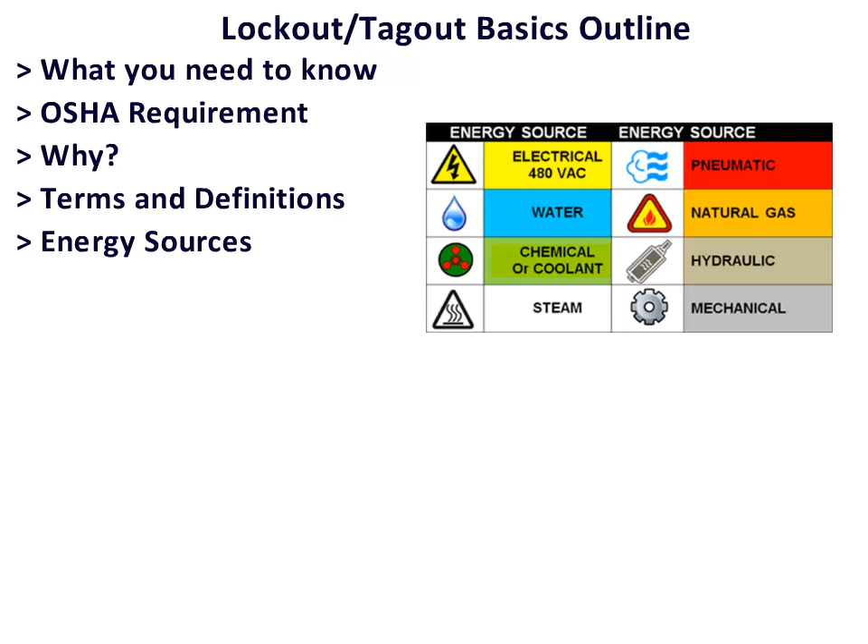We will touch on the types of energy sources. We'll step through the process itself. Next, we'll talk about the need for training. And finally, we'll provide some websites where you can find further information on Lockout Tagout.

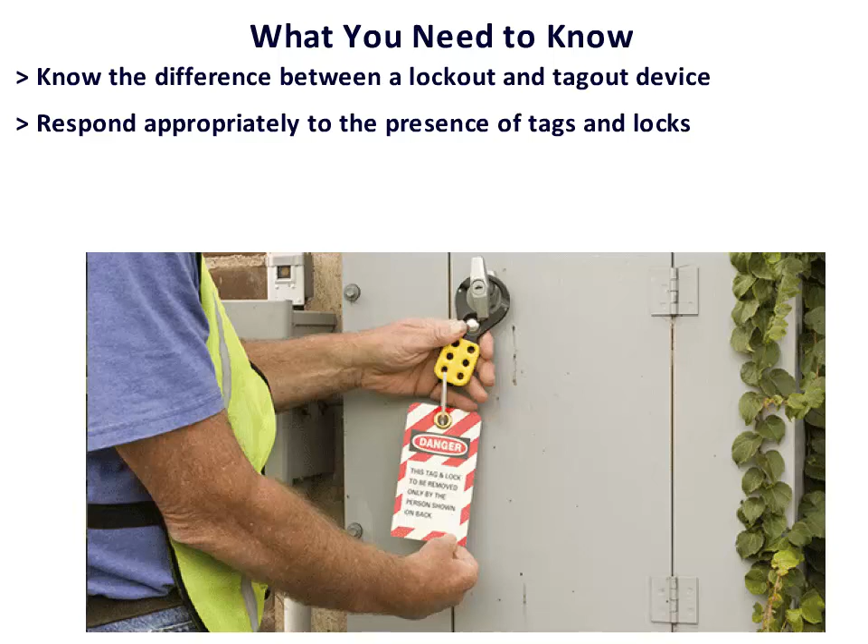Here are some key points that you need to take away from this module. You need to know the difference between lockout and tagout devices. You will need to respond properly to the presence of tags and locks. You should be able to recognize potential hazards of stored energy. You'll need to gain as much knowledge as you can covering NFPA 70E and OSHA CFR 1910.147. These will be covered in more detail throughout the module.

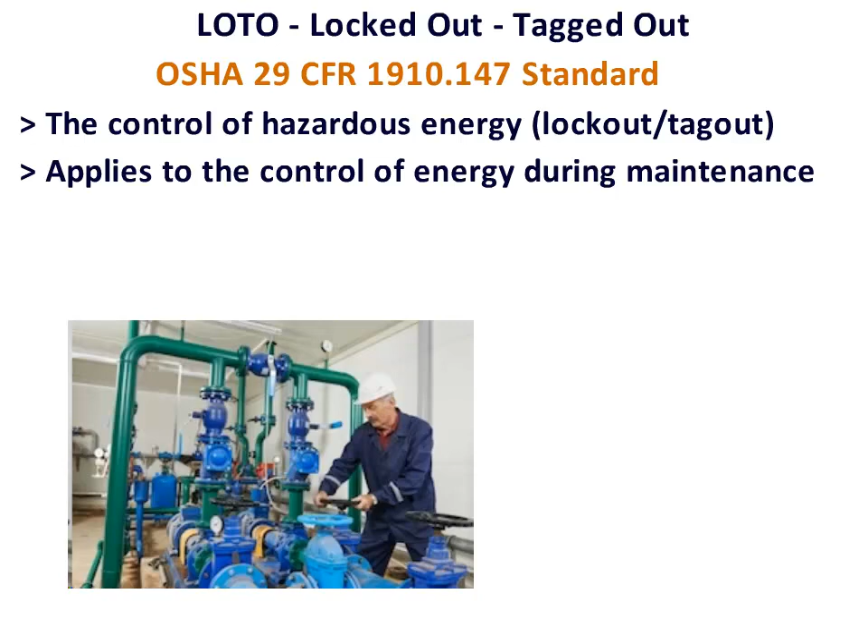You might hear electricians use the term LOTO. The L stands for lock and the O stands for out. The T stands for tag, and the last O stands for out. It's an outcome of OSHA Standard 29 CFR 1910.147. It defines the control of hazardous energy by locking out and tagging out equipment to avoid injury. It applies to the control of energy during maintenance conditions. All sources of energy must be secured during maintenance procedures.

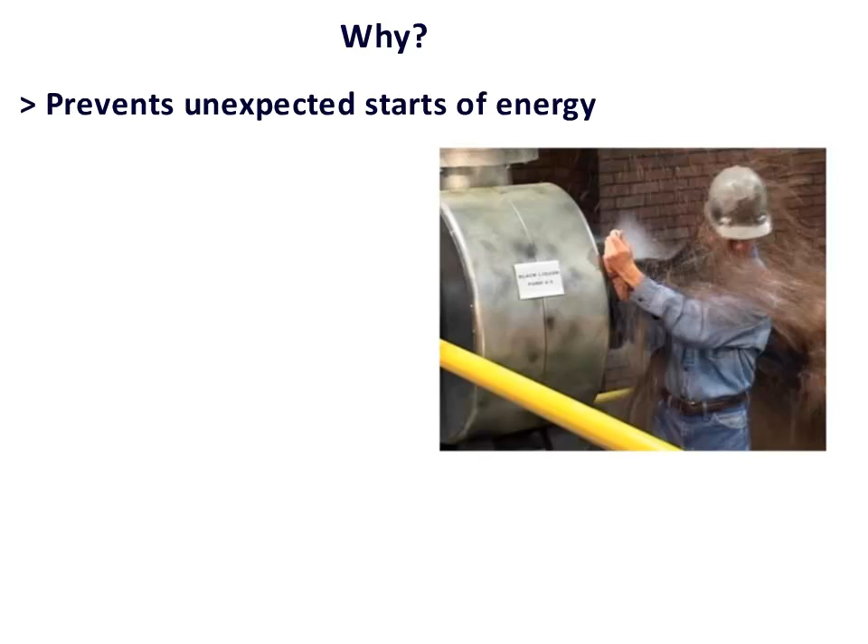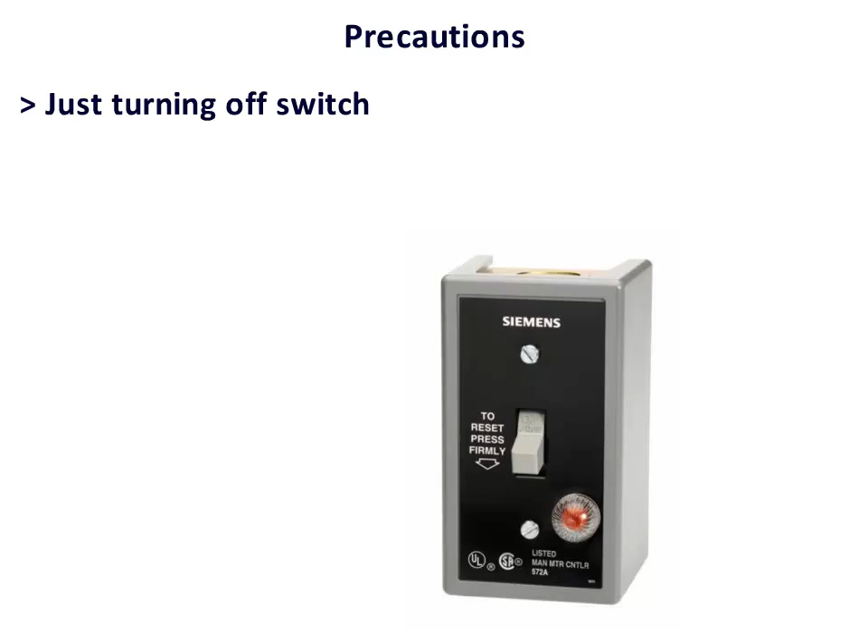Now let's discuss why this is important. First, it protects the worker from unexpected starts of energy. It is set up to prevent worker injuries. And lastly, it is designed to totally isolate a device so maintenance can be performed. It is important to remember that just turning off a switch is not the same as lockout because there is still energy in the switch. If there is a short at the switch or the machine is accidentally turned on, it will energize and cause it to run.

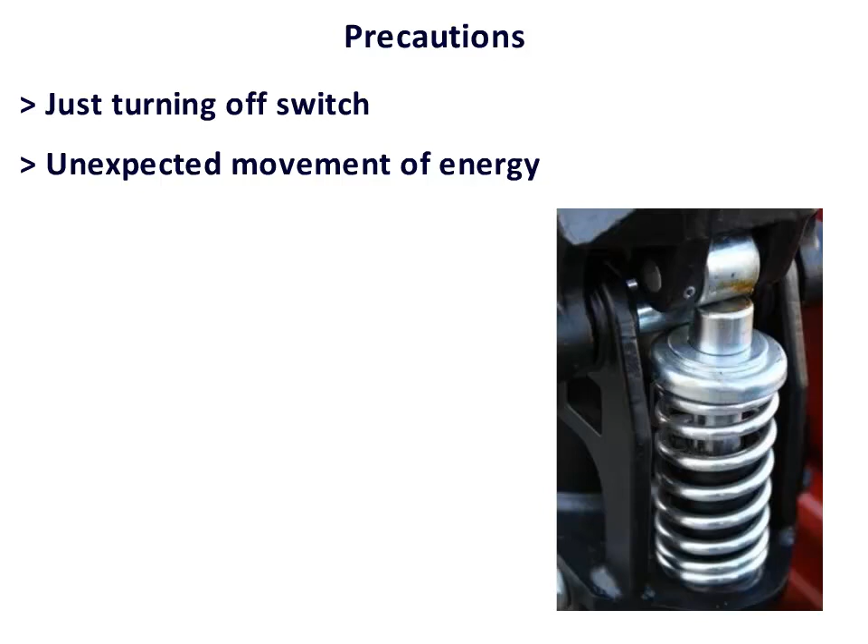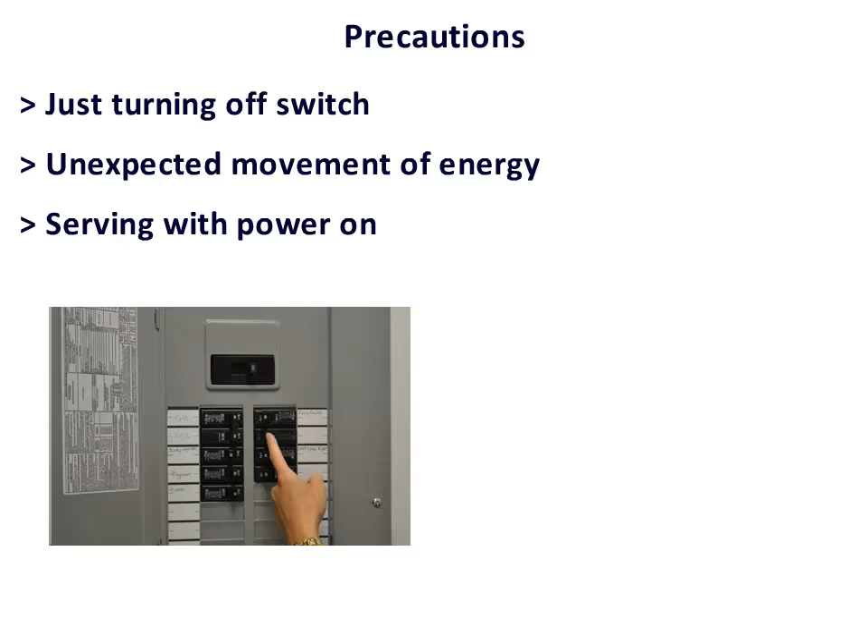Remember that many types of hazardous energy sources, such as springs or air, oil, steam, or water pressure, can cause sudden and unexpected movement of machines and hurt or kill you. To work safely, all hazardous energy sources must be controlled so that no machine or machine part can move. Sometimes machines and equipment must be serviced with power on. If so, your employer must minimize the hazards to you by providing extension tools, for example, extended swabs, brushes, and scrapers, or other methods to protect you from injury.

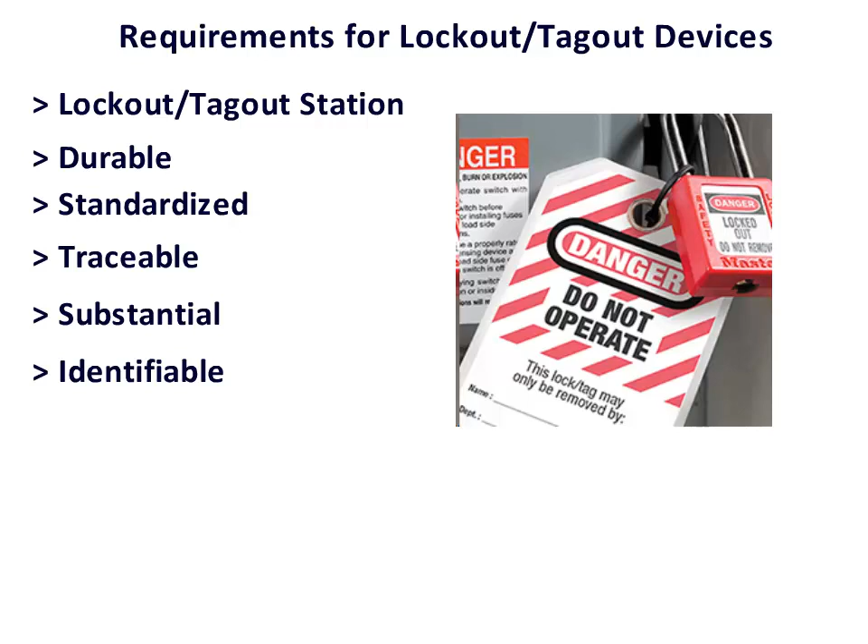Lockout tagout devices are usually organized in a center or station as seen in this photo. All lockout and tagout devices must have minimum characteristics. They must be durable and capable of withstanding the environment in which they are used. They need to be standardized by color, size, and shape to make them easily recognized by employees. They must be traceable by identifying the person who employed them. They should be substantially put on or in place or locked so that they cannot be accidentally removed. They should be identifiable with standard safety phrases such as do not operate, do not stop, or do not energize.

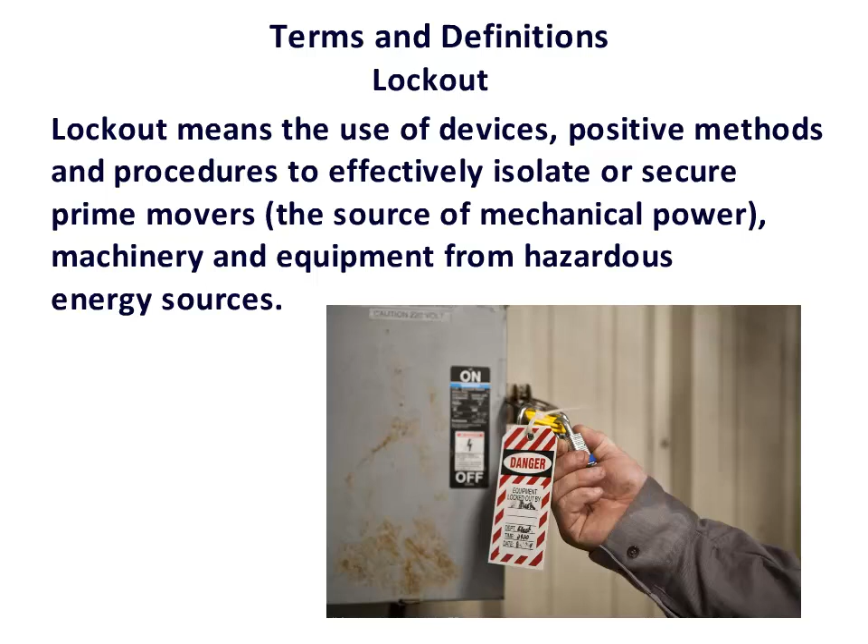The term lockout means the use of devices, positive methods, and procedures to effectively isolate or secure prime movers, which is the source of mechanical power, machinery, and equipment from hazardous energy sources. Its purpose is to provide safety to employees.

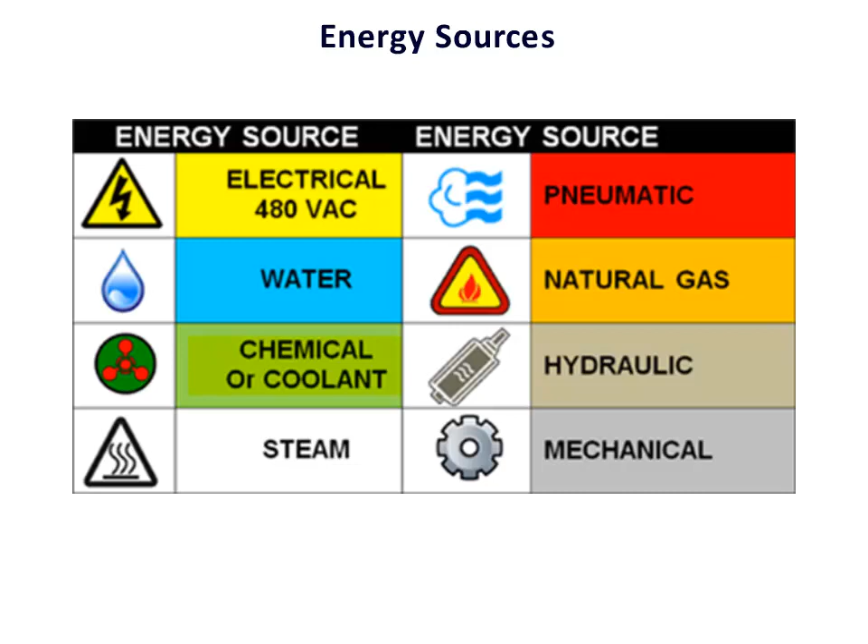Time to go over this concept of energy sources. You find these all over in a typical workplace. They are electrical, water, chemical or coolant, steam, pneumatic, natural gas, hydraulic, and mechanical. If not controlled during maintenance conditions, these can cause harm to workers. Now, what is a lockout device? It is a lock and tag with the contact information of the individual or authorized employee that installed the lock.

Here's a definition of tagout. Tagged out means to place a tagout device on the machine or equipment to show that it is prohibited to restart or operate the machine or equipment. It is important to note that this is a warning only. A tagout device is used when a lockout device is used or when a lockout device cannot be used and the equipment needs to be isolated.

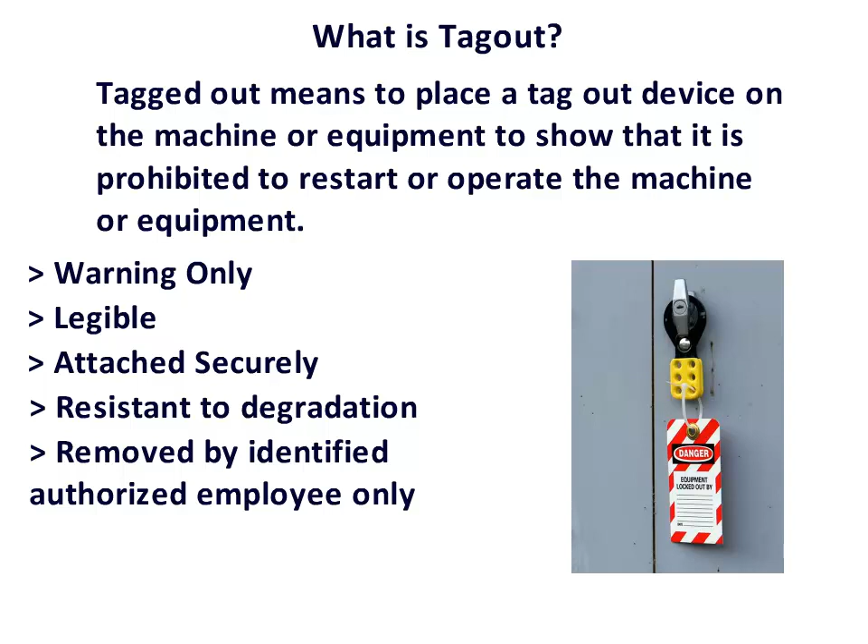Again, these are warning devices only, and they do not control hazardous sources of energy. They must be readable and legible so anyone working in the area can read them and understand them. They must be attached securely to the operating device at the same place a lockout device would be attached. They must be resistant to degradation so that they cannot be crumpled or unreadable. And finally, the tagout device must be identified by the authorized employee who secured the tag and can only be removed by that person.

It is important to understand what an authorized employee is. An authorized employee is specially trained to recognize sources of hazardous energy and to perform lockout or tagout procedures. This means that only the authorized employee can perform lockout and tagout procedures by attaching or removing locks and tags.

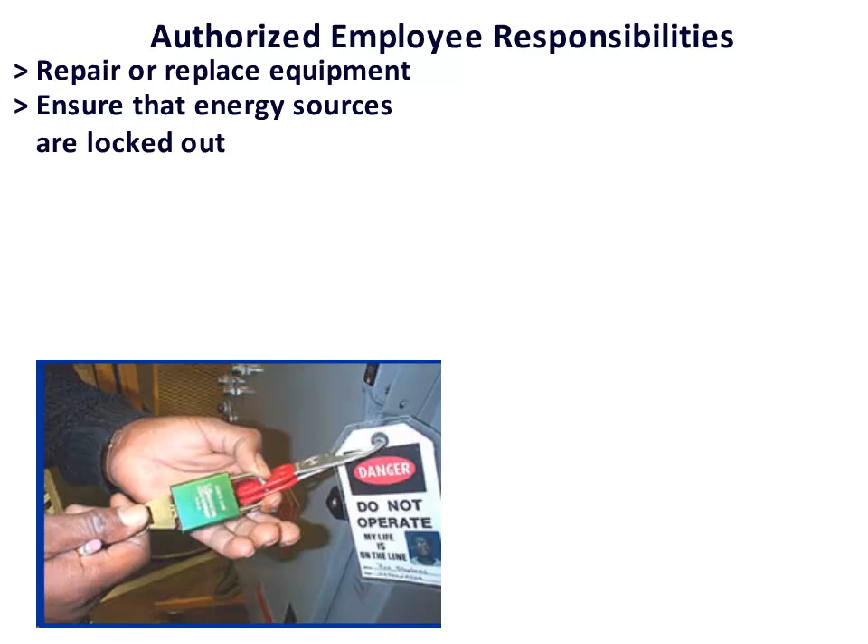Here are the important responsibilities of an authorized employee. They repair or replace equipment as needed. They must ensure that all energy sources are locked out. They need to test equipment to verify that residual energy is dissipated. Place warning tags on the equipment to make sure that other employees could not inadvertently start the equipment when it is being serviced or repaired.

They also need to obtain assistance when necessary to repair machinery or equipment. They must remove locks or tags when the service or repair is completed. And lastly, there may be instances when a repair may cross over different shifts. In this case, the authorized employee must coordinate and communicate to affected employees on all shifts.

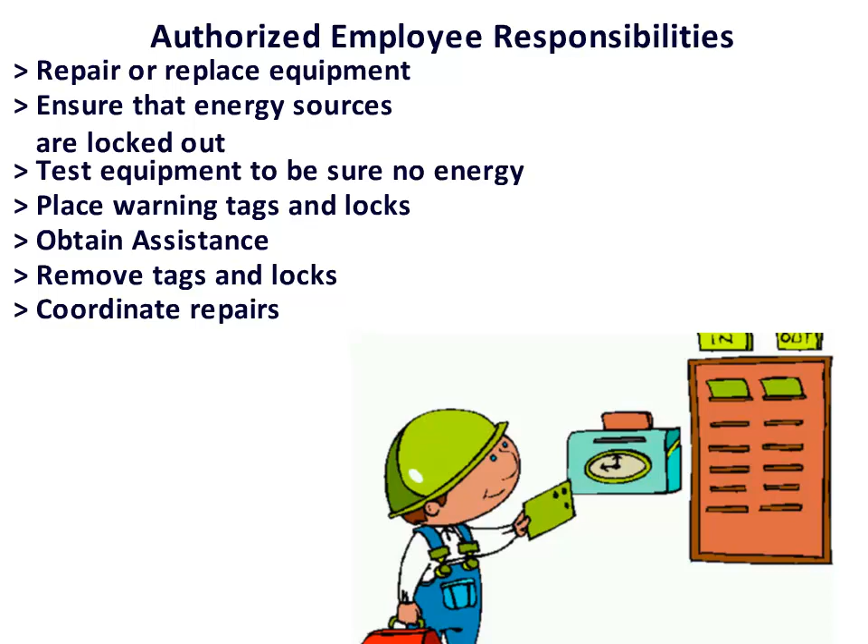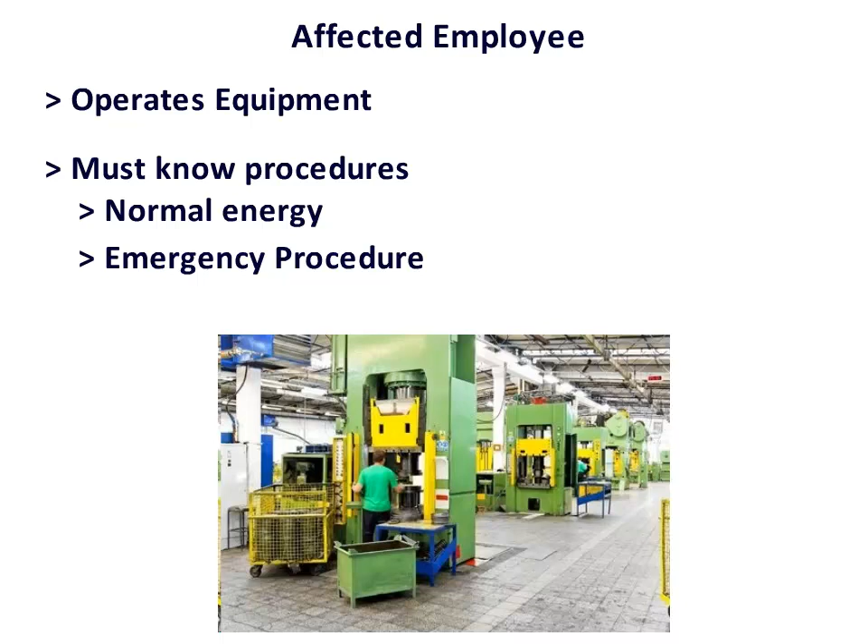An affected employee is one who operates equipment or machinery but is not responsible for servicing or repairing it. However, an affected employee must be trained to know the purpose and use of energy control procedures to make sure that an operator does not inadvertently energize machines when they are under lockout or tagout. The affected employee must also know what to do if the machinery was inadvertently energized as an emergency procedure.

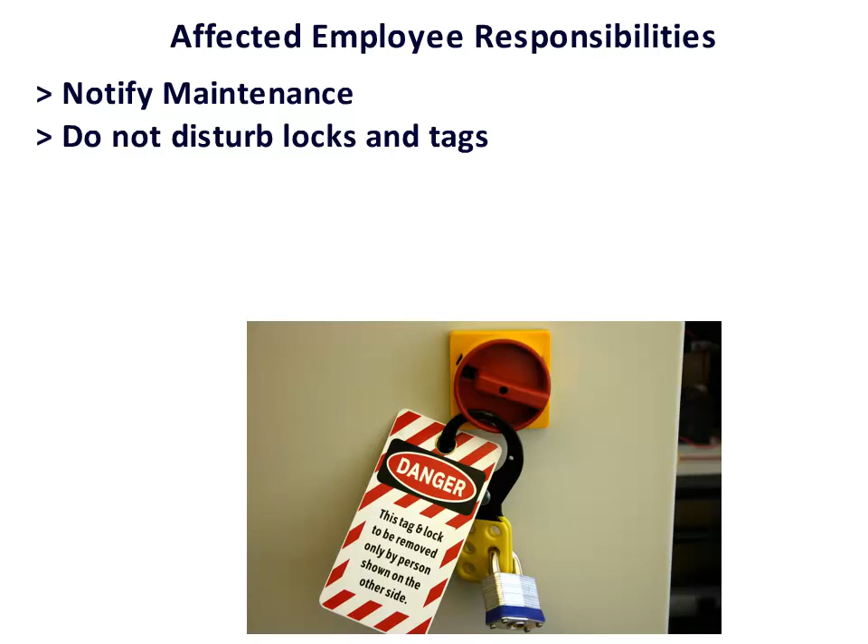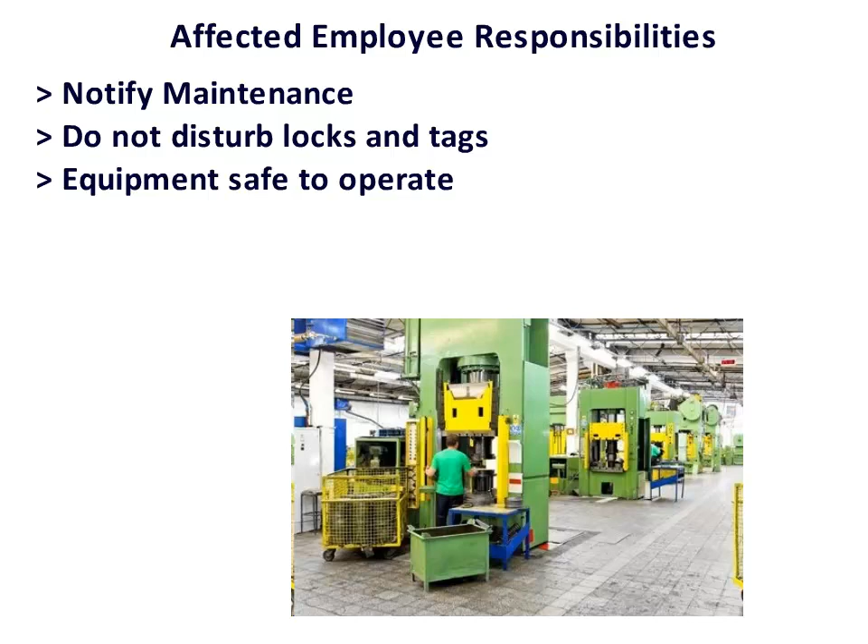Now, an affected employee does have some responsibility. They are the first ones to notify maintenance personnel when equipment needs to be repaired or serviced. When machinery is being serviced, affected employees must leave all lockout/tagout devices in place. They need to be able to verify that the machinery is safe to operate after the lockout/tagout is finished. This includes making sure that all safeguards are in place and functioning. Lastly, affected employees need to follow all workplace safety rules when operating machinery.

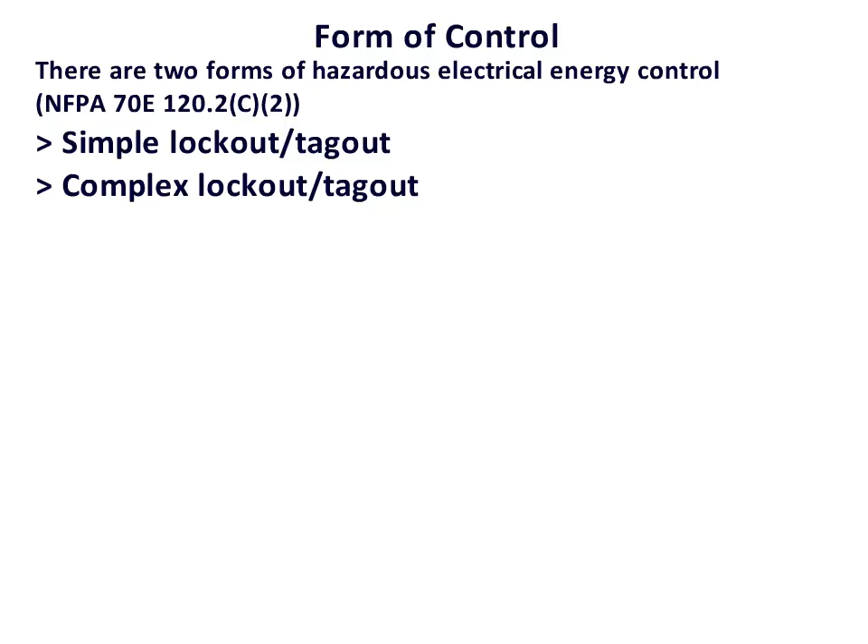One last term that needs to be discussed is form of control. The objective in controlling exposure to electrical energy is to ensure that all possible sources of electrical energy are disconnected and cannot be re-energized unexpectedly. The two types of control are simple lockout/tagout and complex lockout/tagout, which are administrative controls from the hierarchy of safety controls. In a simple lockout/tagout, a qualified person or persons de-energizes one source of electrical energy and is responsible for their own lockout/tagout. A written lockout/tagout plan is not required.

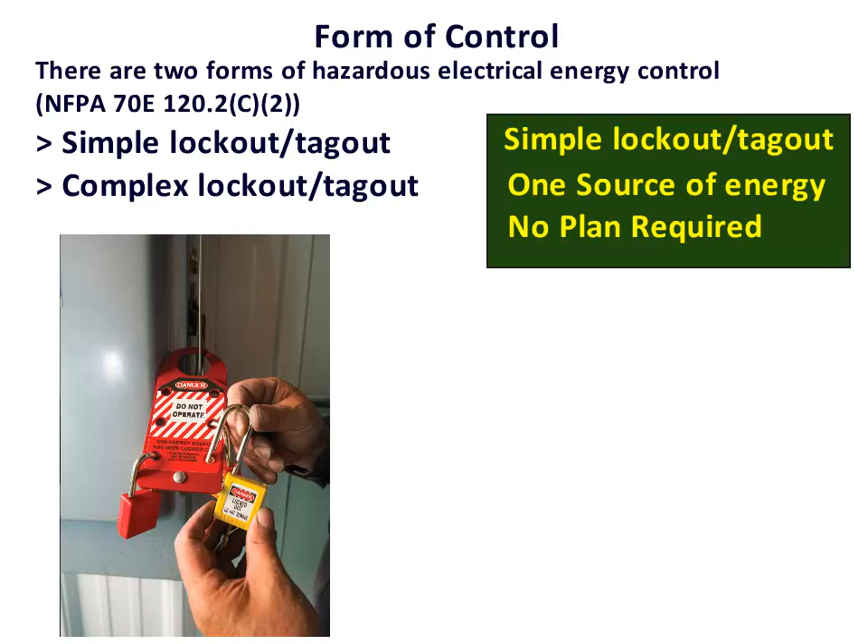A complex lockout/tagout typically involves more than one energy source, more than one disconnecting means, requires a single person with overall responsibility, and a written plan prepared in advance for each lockout/tagout application.

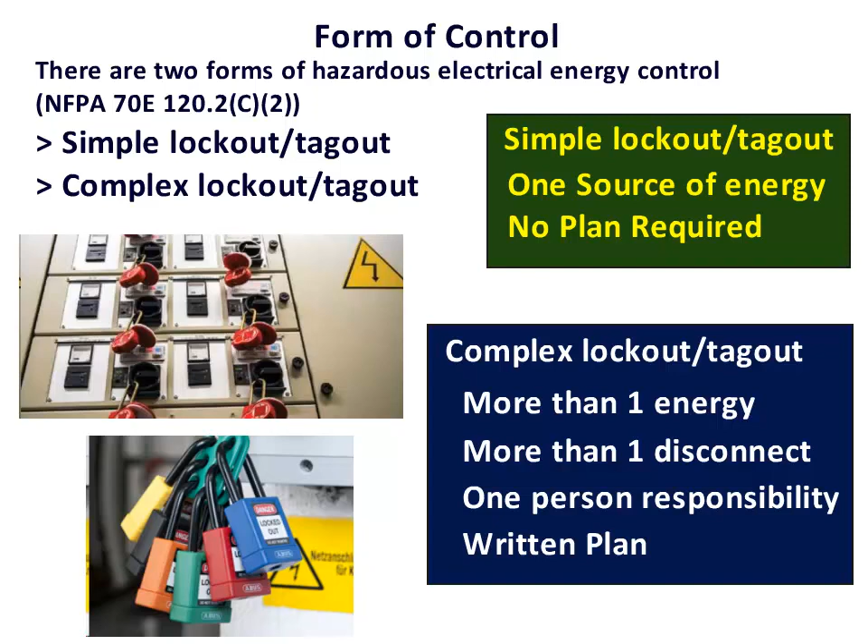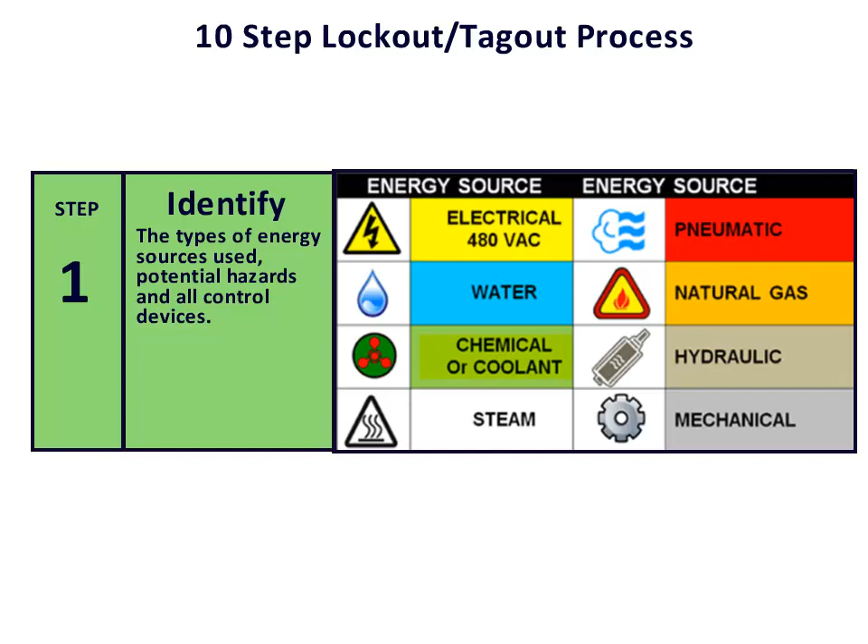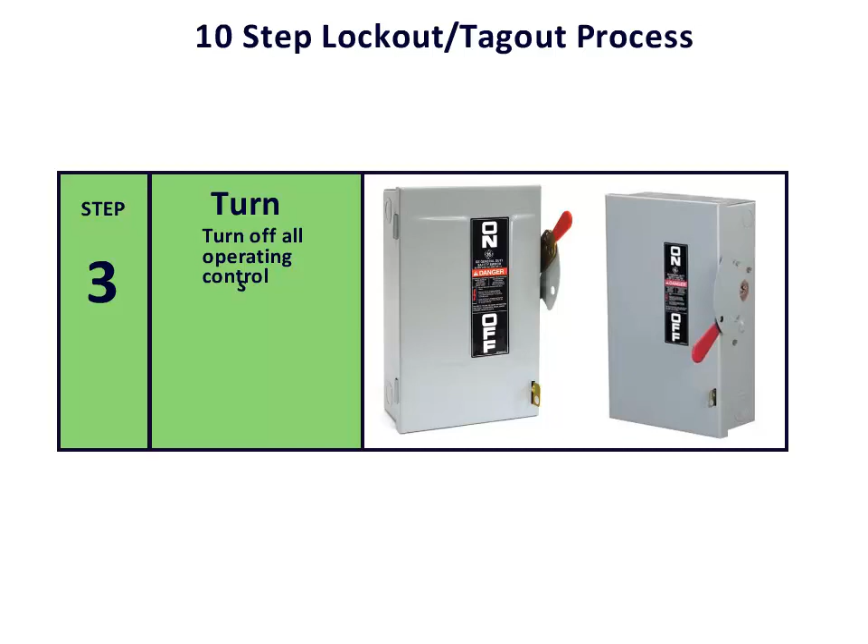Now that all the terms are explained, it's time to look at what is involved with the process of lockout/tagout. Let's look at it step by step. The first step is to identify the types of energy sources used, potential hazards, and all control devices. The next step, 2, involves notifying all the employees. In step 3, it is necessary to turn off all operating control devices. Next is step 4, to locate all the energy sources.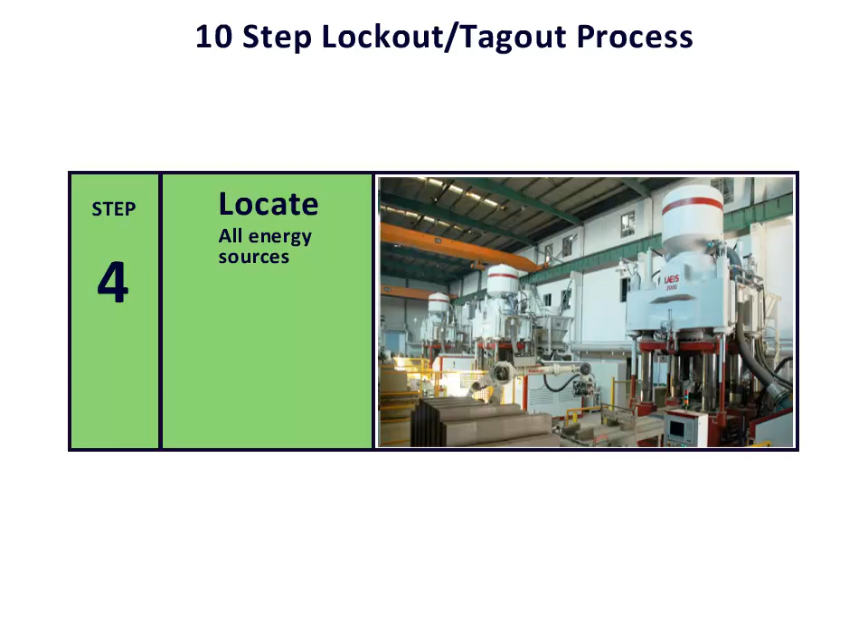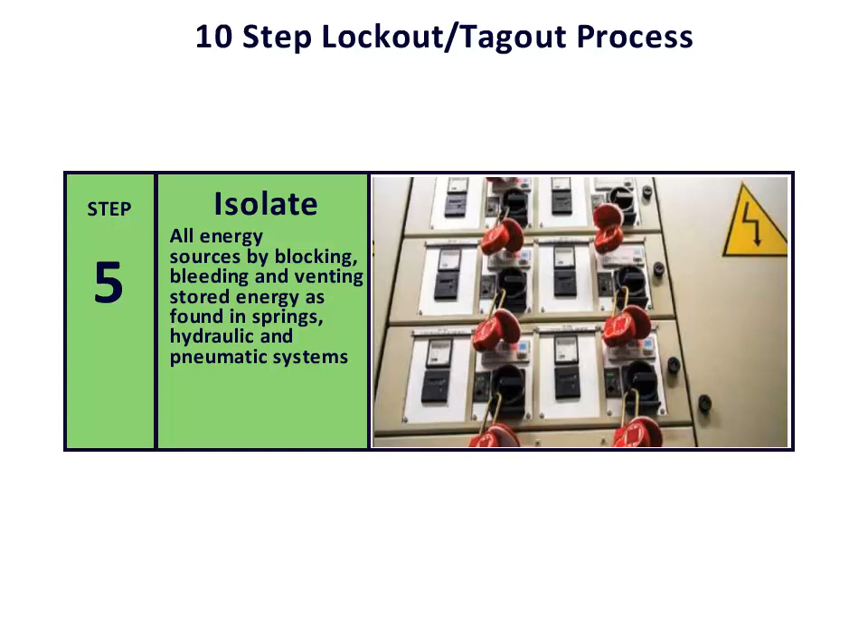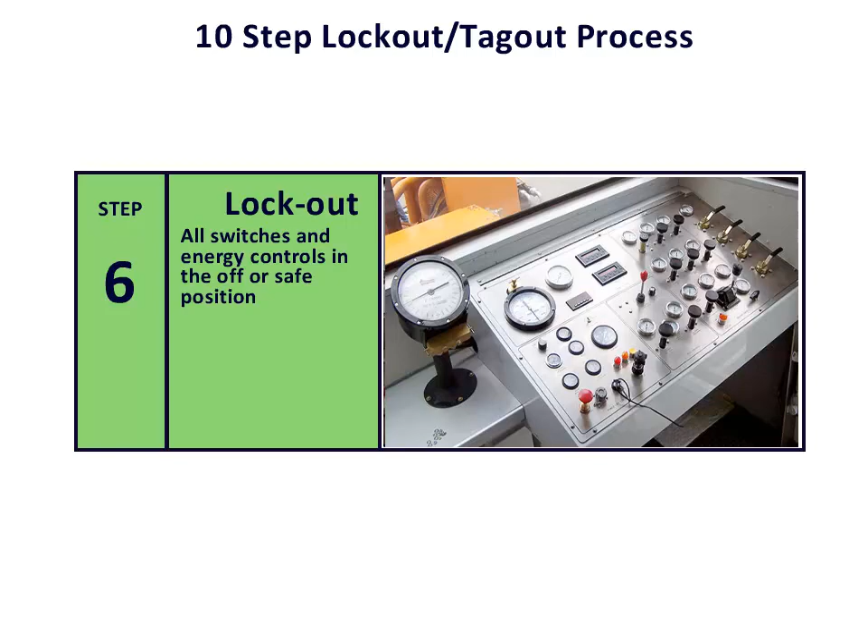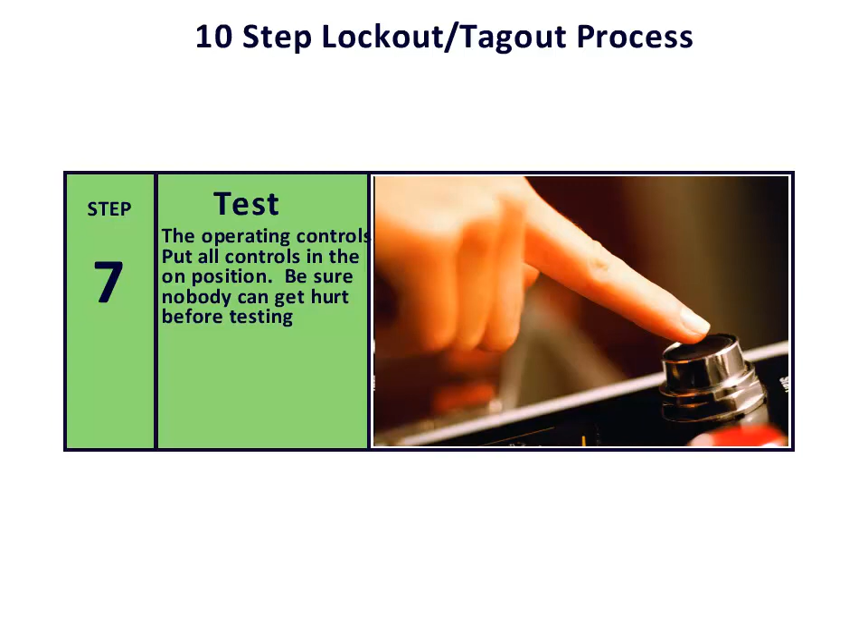In step 5, you need to isolate all energy sources by blocking, bleeding, and venting stored energy as found in springs, hydraulic, and pneumatic systems. In step 6, you need to lock out all switches and energy controls in the off or safe position. Testing the operating controls by putting all the controls in the on position, being sure nobody can get hurt before testing occurs, covers step 7. Now comes step 8, which is to return all the operating controls to the off position.

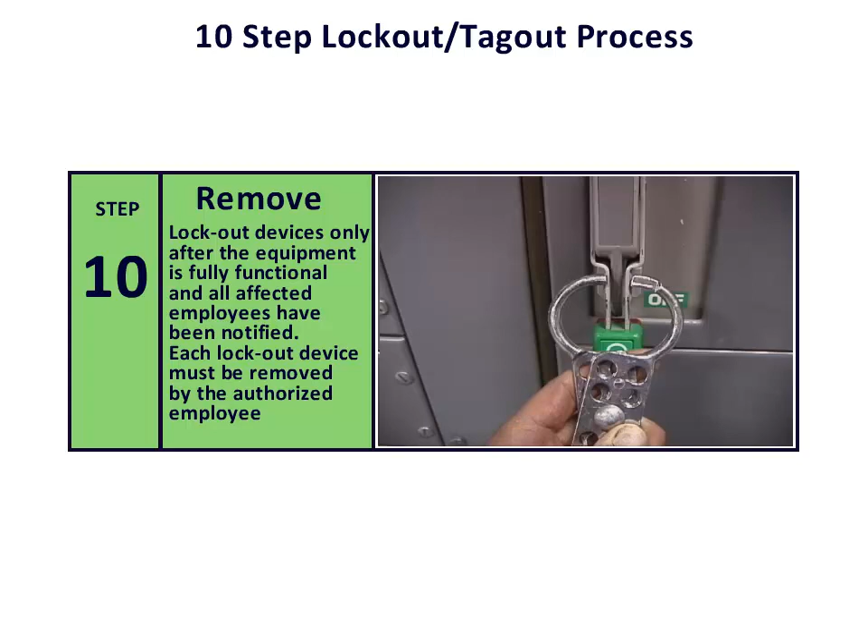In step 9, the required maintenance or repair task is accomplished. The last step is 10, and that is to remove the lockout devices only after the equipment is fully functional and all affected employees have been notified. Each lockout device must be removed by the authorized employee.

All persons who could be exposed or affected by the lockout/tagout shall be trained to understand the established procedure to control the energy and their responsibility in the procedure and its execution. New or reassigned employees shall be trained to understand the lockout/tagout procedure as it relates to their new assignments.